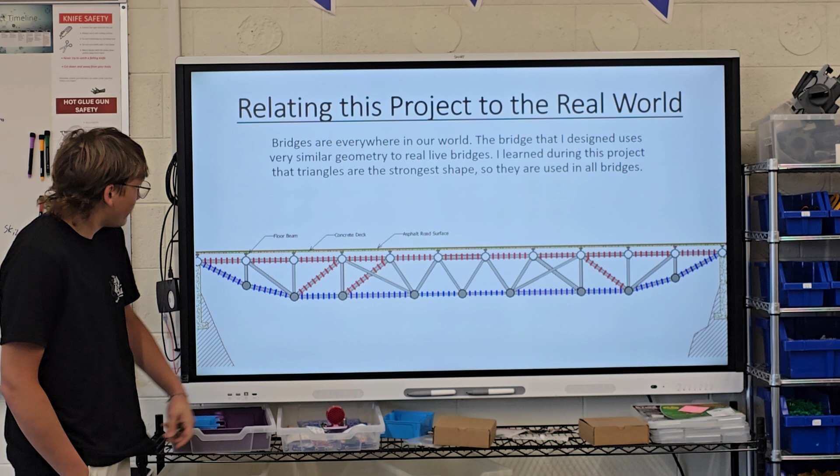The main issue that I had while designing my bridge was trying to get cheaper than James, while still having my bridge stand. Although I was able to make my bridge pretty cheap, I wasn't able to get cheaper than James. Overall, I was happy with my final bridge design.

I learned a lot about the program that we used to design our bridge. There are several factors to consider as far as cost is concerned. I have learned all kinds of things about bridge planning throughout this project.

The process of managing the cost of the bridge was relatively simple. I'd build it and then make the pieces as small and as skinny as I could. But there was a specific piece that cost extra, even though you made it little. It was weird.

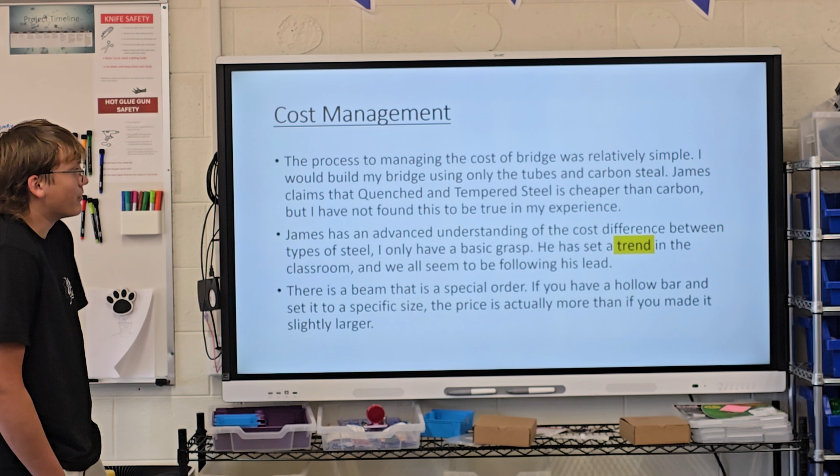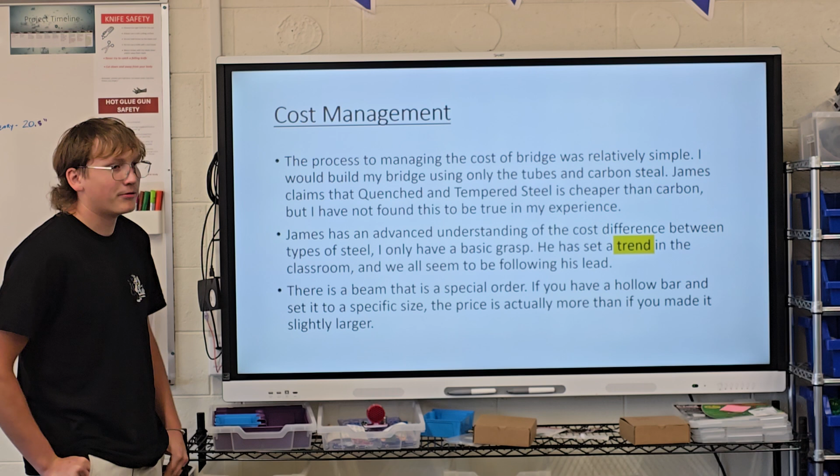James has an advanced understanding of the difference between the types of steel. I didn't really get it. So he has set the trend in the classroom, and we all followed it pretty closely. I mean, all of our bridges ended up looking kind of the same.

On my first day, I began designing my bridge. That was first, and I would consider that to be a prototype. I figured out which materials are cheaper than others, and yeah.

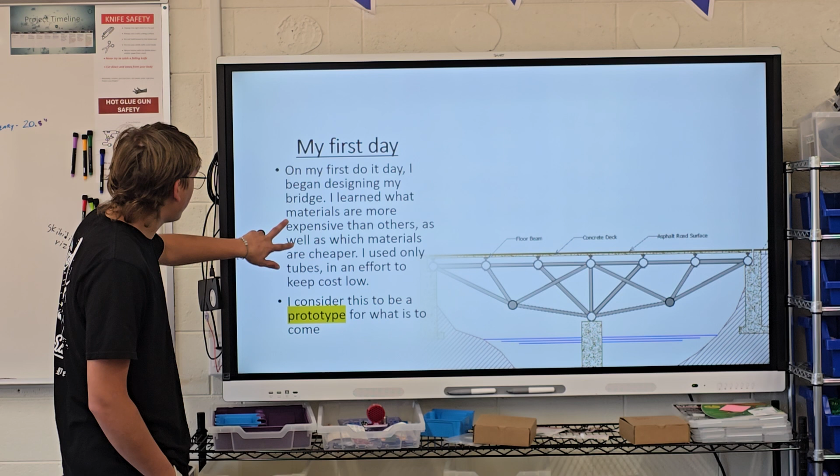On my second day, I was jealous of James because he got his insanely cheap, and he was using some other weird materials, and I don't understand. But I was able to get it cheaper than the previous day. I got it to 186.5. It gets lower than that later on.

On my third day, I continued to brainstorm. We got down to this, which I believe is not the cheapest I got it, but that is pretty much the design. A little different. It changed a little bit.

The engineering design process is identifying an issue and then trying to create something to solve that issue. And you have to go through a lot of trial and error trying to figure out what is going to best solve your problem.

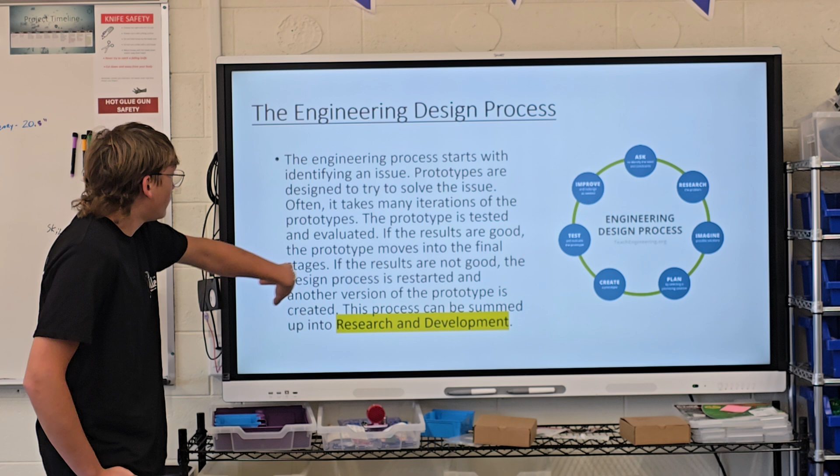In conclusion, I feel that I achieved my goal. I made it across the river valley. I got my bridge to $111,000 cheaper than my initial bid proposal. I would not like to do this again just because we spent a really long time doing it. But I feel like I've learned all that I can from this. I like the creative freedom, and I would consider myself successful in this project.

I learned how different shapes and structures distribute the tension, and I really enjoyed working on this project.

That is my cost report, final. It ended up being 180, and yeah, I only used like a few pieces.

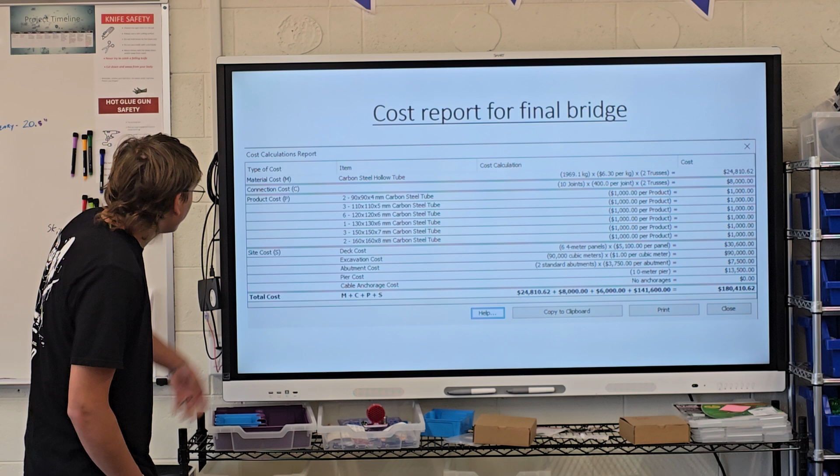Yep. Vocabulary. All right, yeah.

Unit 1, Invention Innovation Unit.

Alright, here's my bid proposal. The challenge was to design a bridge for the sanctuary, and it would require a bridge to support large delivery truck access. I asked the mayor to build my bridge for a total of roughly 300,000, which would be what I was shooting for.

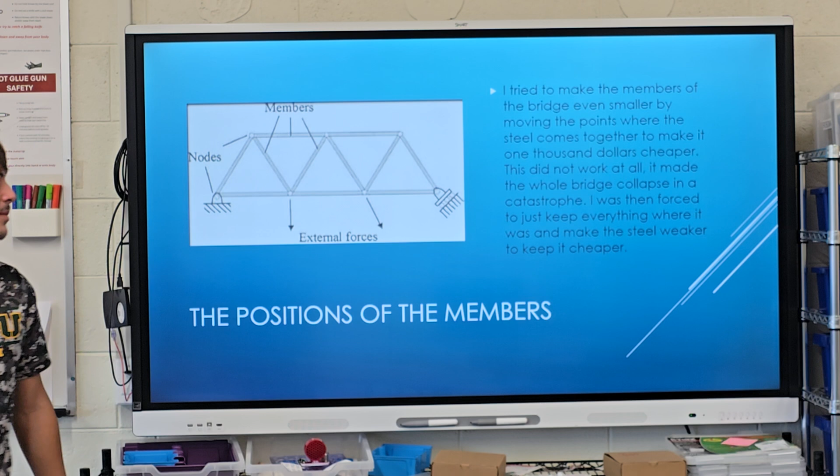I also learned about the positions of the members. I tried to make the members of the bridge even smaller by moving the points where the steel comes together, to make it $1,000 cheaper. That did not work at all. I made the whole bridge collapse in a catastrophe.

Price range: the price of steel varied quite a bit depending on the size and type of steel. I found that certain parts called for certain sizes and types of steel to achieve peak cheapness for the bridge. I learned that the main sizes for quenched and tempered steel were 130, 90, and 75.

My ultimate goal was to make the cheapest bridge that seemed possible. I started out at roughly 200 grand and slowly worked my way down to 174 grand. My biggest strategy was to find the strongest part of the bridge and make it smaller, resulting in a cheaper bridge that was built.

This was my final cost. I ended up using 17 total pieces.

In conclusion, I ended up making my bridge proposal goal of $300,000, and I made the goal by a whopping 100 grand. I didn't think it was possible, and that was total blasphemy when I started my project. I ended up doing this thanks to my strongest-and-make-it-weaker type of strategy.

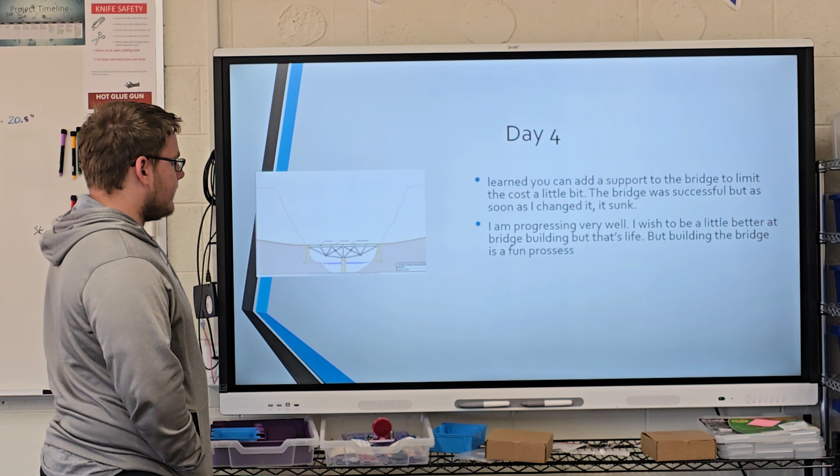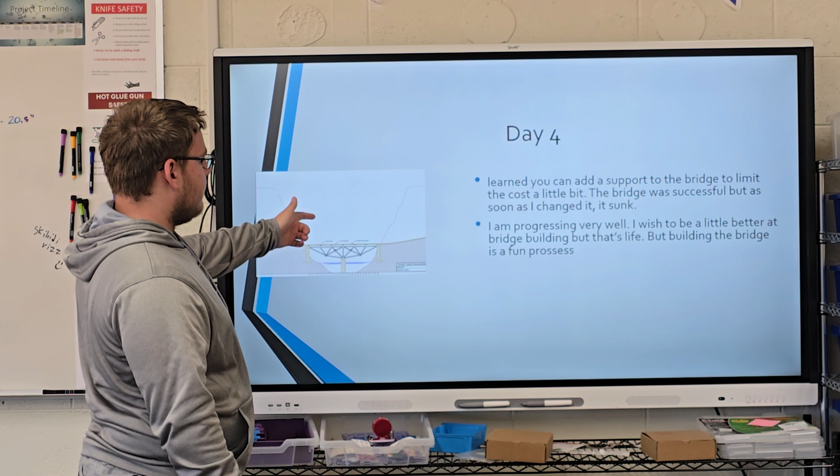Day 4, I learned that you can add a support to the bridge, like this middle cross beam, to limit the cost, and the same thing happened. I wish it was a little better, but building the bridges was a fun process.

The other problem I had was the bridge of the full length. The full length bridge was a lot harder to do and keep under budget, but with hard work, determination and grit, I managed to do just that. My final bridge for the full length was 207, my bad.

Did I have fun? I had a lot of fun with this bridge builder. Building the bridge and finishing the project is satisfying. The more you build, the more fun it becomes for me. And when I built something that made everyone laugh, that was cool - I try to make everyone laugh, that's just a part of me.

My challenge again is to apply building skills under the pressure of the clock. My final cost was less than my bid. I tried to simplify this as much as I could. I met my bid proposal goal because of determination and grit.

I would love to do this again because building bridges - who doesn't want to build a bridge every now and then? If you were a kid and you loved Legos, what's the first thing you built? Something that holds something. What I like about the project is the builder, mainly because when you build the bridge, you're able to test it and see if the bridge fails or not.

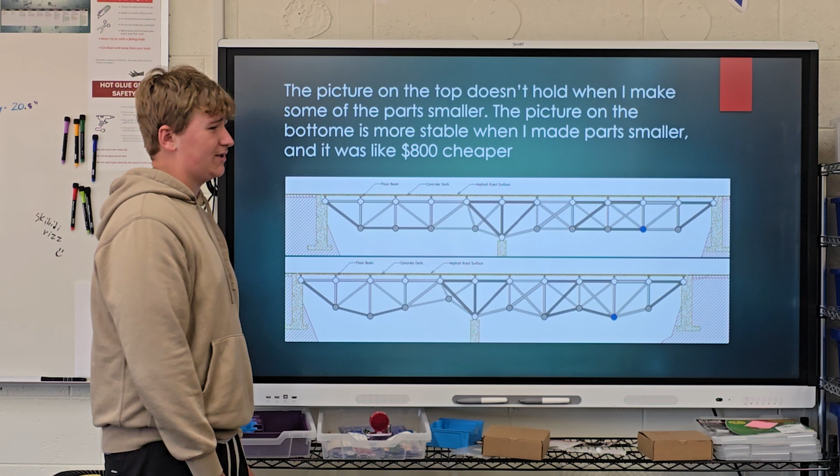What did I learn? On the first few days of this launcher, I learned about the difference between invention and innovation. I also learned about a few inventors and innovators. Here are two of them: I learned about the invention of the wooden golf tee, and the innovation of the golf ball.

The engineering design process, EDP, has a few different parts. First, you must define your problem. Then you do research on the issue. After is a cycle that can be repeated as many times as you need. The cycle includes designing a solution, building, testing, evaluating, and then redesigning. Some research and development might be required to get your start.

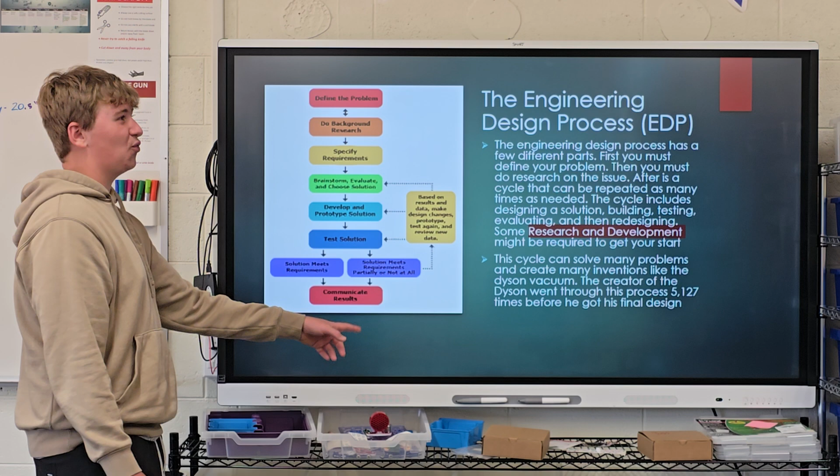This cycle can solve many problems and create many inventions, like the Dyson vacuum. The creator of the Dyson went through this process 5,127 times before he got his final design, the dual cyclone bagless vacuum.

Alright, first days of Bridge 1. On the first day of making the bridge, I'd already beaten the extend yourself goal of $200,000 with my prototype, and I hadn't found any good strategies for making it cheaper. On the second day, I made some more advancements and got the bridge down to $187,552. I added a pier and made my bridge centered around that support instead of just the tension of the parts.

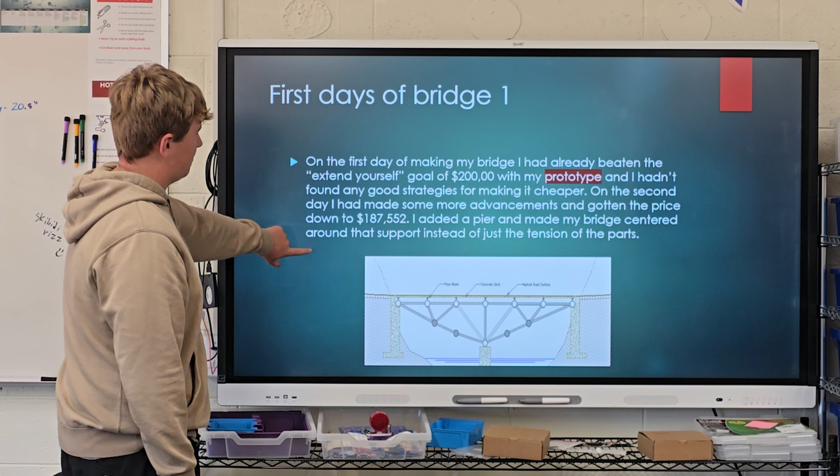Oh, that's not supposed to be on that one. Which one? Oh shoot, one of the slides got deleted. You skipped it. Result of bridge—oh, there we go.

Okay, my bad. On the final days, I finalized my design for the bridge and reduced the size of parts down to the cheapest while still stable. I got the design of the bridge to support the weight I needed and almost no extra. My bridge allowed for some flex, which helped it stay standing. My final price of the bridge was $180,635.

All of us in the class fell into the trend of designing our bridges in an inverted arch design, which is what this is called when it dips down and then goes back up.

Okay. No, hey, who can—yeah. Just a quick little flip, like. I got it. I don't know why it worked for me. Slide, please.

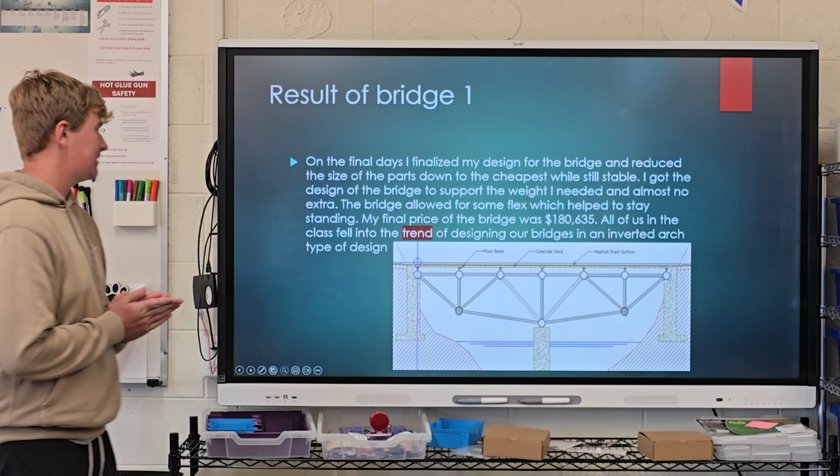Alright, first day of the second bridge. On this one, I attempted to build a bridge with new criteria of not excavating. On the first day, I made a bridge that was around $240,000.

I deleted that bridge to restart my design. On the second day, I got my design that I was going to stick with the whole time. I used a lot of the techniques from the last bridge, just scaled up.

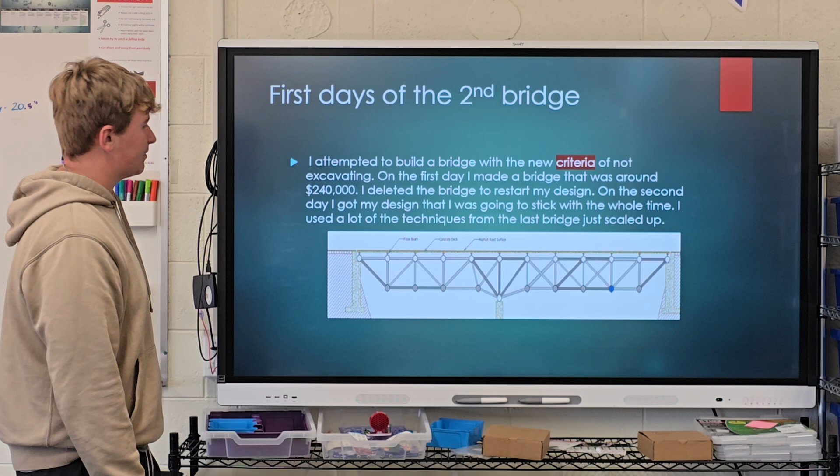Yeah, it's not working. God. Second bridge results.

I got my final design of this bridge down to around $203,000. My final design included that funky little adjustment down there and a pier in the middle.

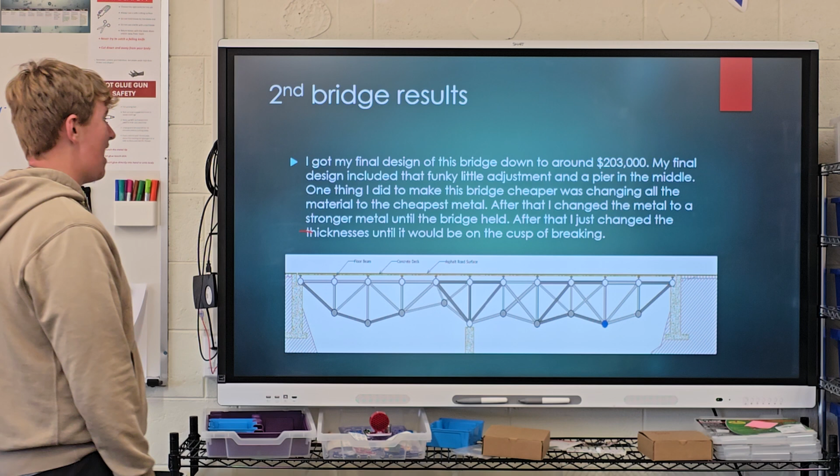One thing I did to make this bridge cheaper was changing all the material to the cheapest metal. After that, I changed the metal to a stronger metal until the bridge held. Then I just changed the thickness until it would be on the cusp of breaking.

Conclusion: I felt my bid proposal was okay. I got my point across. Could have had more detail, but my bid proposal was based directly around the results of my first design of my bridge, so I fit into the constraints of the bid proposal.

If I could do this launcher again, I would, and I would keep trying to get my bridges cheaper, even though I completed all the launcher's goals, so I have no reason to.

Something I liked about this launcher was that we could all collaborate and try to make the cheapest bridge with each other's help. I learned that we could complete the challenges with the bridge builder, because last year no one even got close. This project went well. I had success building my bridges.

Invention versus innovation, bid proposal. The challenge that was assigned to me was to build a bridge for a make-believe town and win the bid. The original task was to make a bridge under 200,000, full length. My bid proposal actually got stolen.

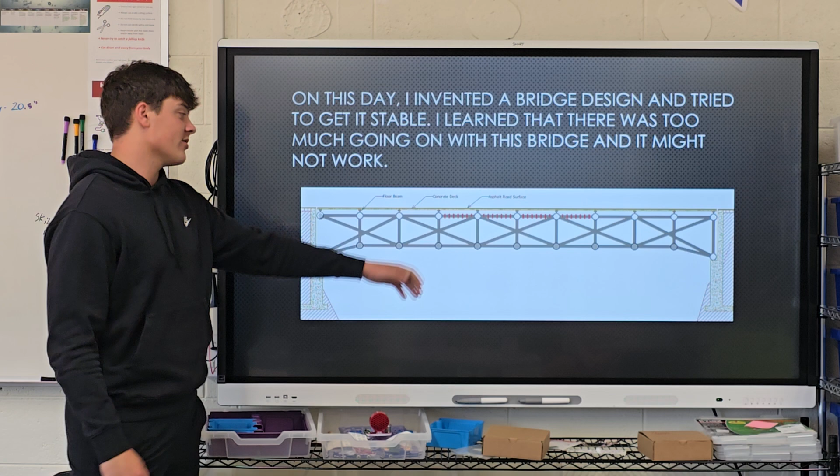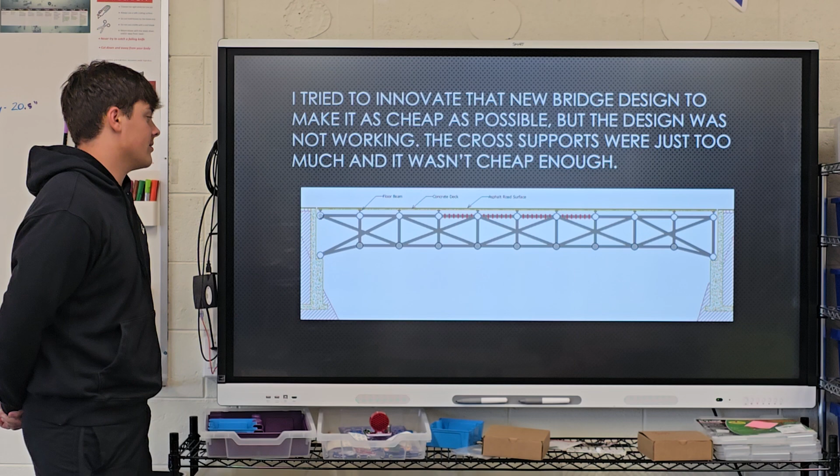I tried to innovate that new bridge design to make it as cheap as possible, but the design was not working. The cross supports were just too much, and it wasn't cheap enough. I learned that it's just going to cave in the middle, and I need to use the pier.

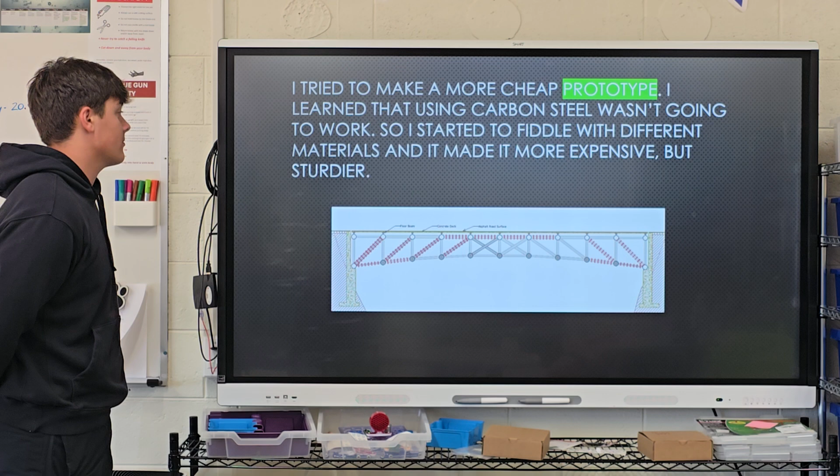I tried to make a cheaper prototype. I learned that using carbon steel wasn't going to work because it just broke way too fast and was way too heavy. So I started fiddling around with different materials, and it came to my mind that it was going to be quench and tempered steel. That was going to be a little more expensive, but it was sturdier.

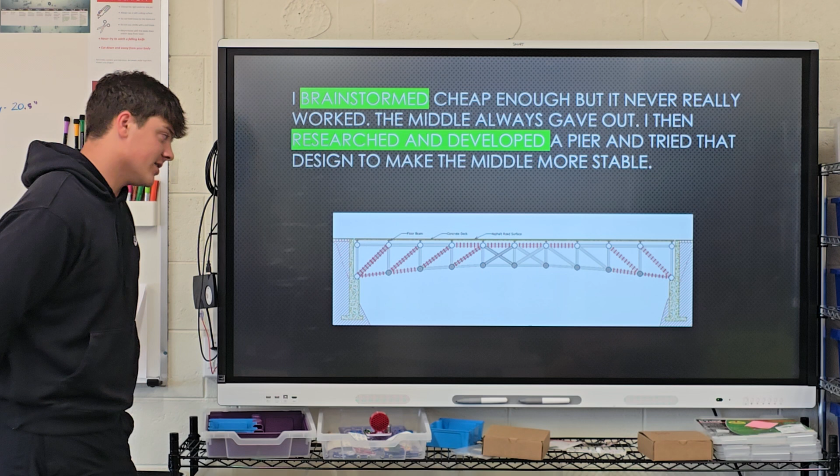I brainstormed cheap enough options, but it never really worked. The middle was always giving out. So I researched and developed this design and tried it to make the middle more stable. As you can see, this design was pretty cool, but it wasn't doing it for me. The middle was still giving out.

I came up with a new bridge design that took the tension off the middle of the bridge. It worked really well. I built the whole bridge with my quench and tempered steel. This helped make the bridge more sturdy and cheaper.

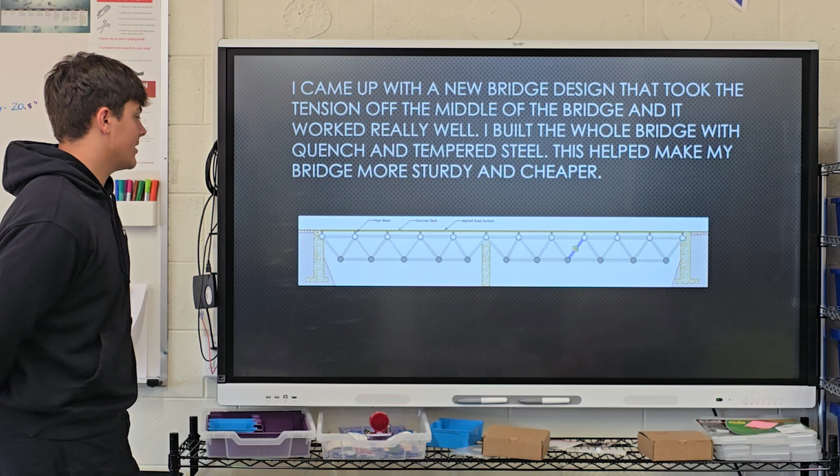And this was the final bridge product. I learned that this was going to be the cheapest I was going to get the bridge, and I learned that the pier was going to help a lot because it helped support the middle so that it didn't just cave in every time I tried to drive a truck across.

Conclusion. The criteria was to design a bridge for a site requiring sturdy roads for large delivery truck access. It was supposed to be on the Yellowstone Reserve or something, but Mr. Pondu told us to do whatever we wanted, wherever we wanted. So the challenge was to design two attractive, creative, and affordable bridge solutions. We did the scaled bridge and then the full-length bridge.

Within the unit, I learned how to build a couple different bridges. For the first one, we were able to excavate the land, and for the other, we had to build a bridge across the whole river span, with constraints on excavating the land for the second bridge. For the first bridge, we came up with a cheap bridge, but it wasn't the cheapest in the class — as we know, James got like 177, 178. For the second bridge, I came up with the cheapest bridge.

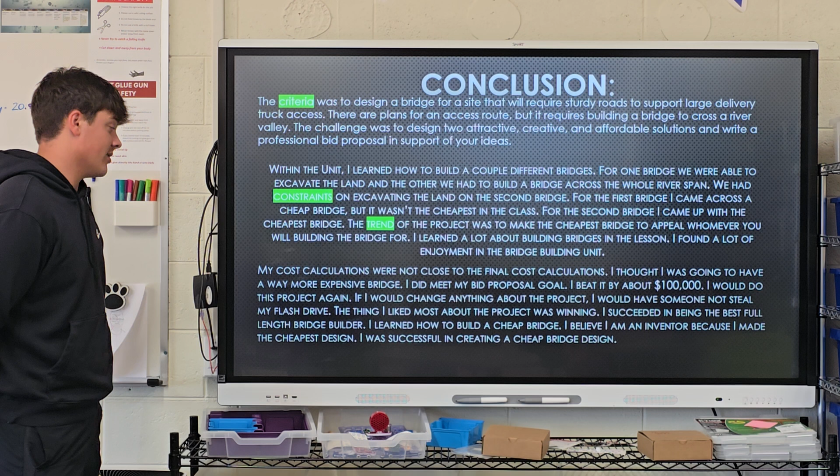The trend of the project was to make the cheapest bridge to appeal to whomever you were building the bridge for. I learned a lot about the bridge building process in this lesson, and I found a lot of enjoyment in the unit. As for my cost calculations, I kind of lost those, so I kind of ramble here about them.

The best part about the project that we did throughout the 20 days, my favorite part, was winning. I loved winning at the second bridge. I succeeded in being the best full-length bridge builder, and I learned how to build cheap bridges.